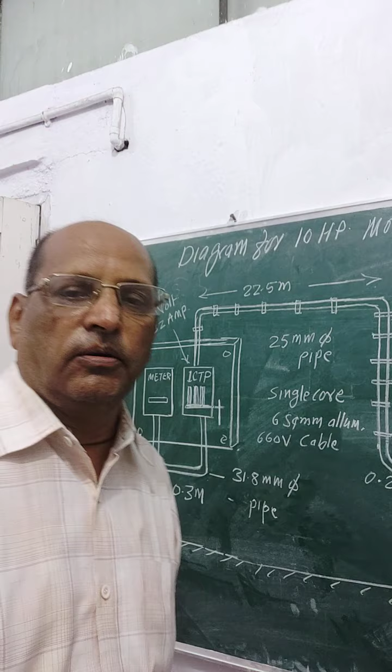Yesterday I have taken the 10 HP problem of induction motor to be installed in a workshop. Diagram I have shown on the drawing sheet, but that was not so clear. So today I have drawn this diagram completely on the board, in which all the dimensions are very clear, so your calculation will be easy to understand.

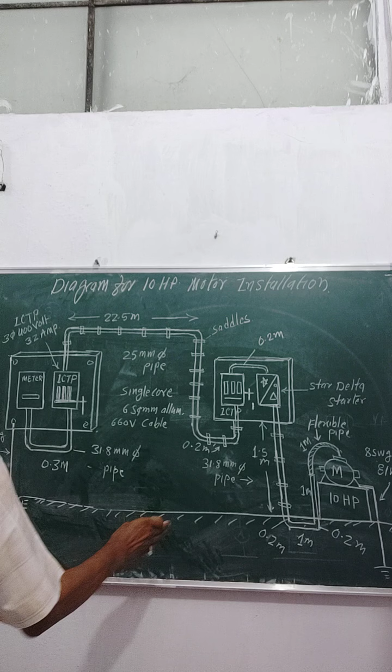See, this is the complete diagram in which I have shown. This is the ground level, all the dimensions are given. This is the main board, meter, ICTP of 32 ampere here.

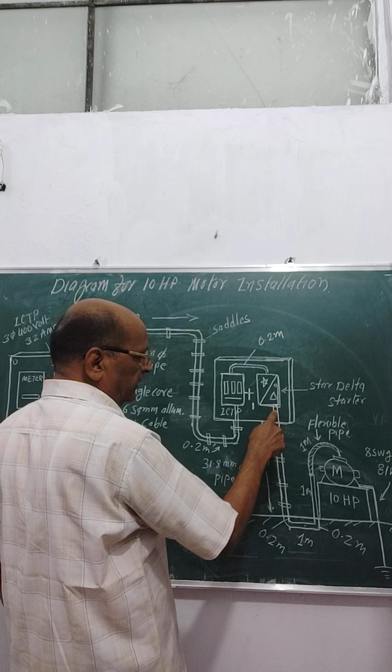Then this is run 25 mm dia pipe from this point to this point. Total length 22.5 meter, then 0.2 meter here. Then here 6 wire will go, so the diameter of pipe will be 31.8 mm.

Because 3 wire will run up to this single core, so up to this total length we do 3 times. Here 6 wire will go up to the motor terminal, so same single core cable of 6 square mm, it becomes 6 times in this. So the calculation or estimate I have already given yesterday, so you just take this drawing seriously. It is given all the detail.

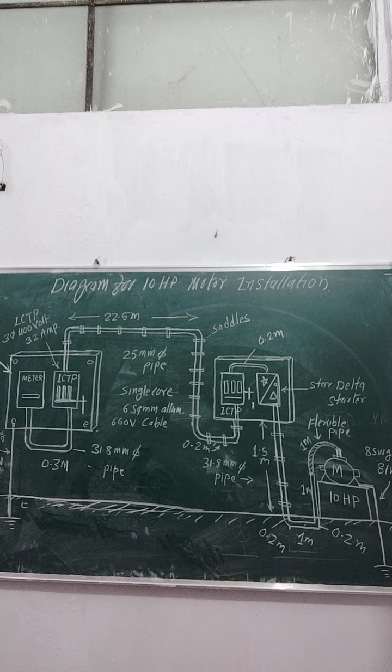This is the meter, supply is coming from the pole or the service pole, and from where this complete diagram is there. So this finishes your total topic number 2, in which there are 2 problems.

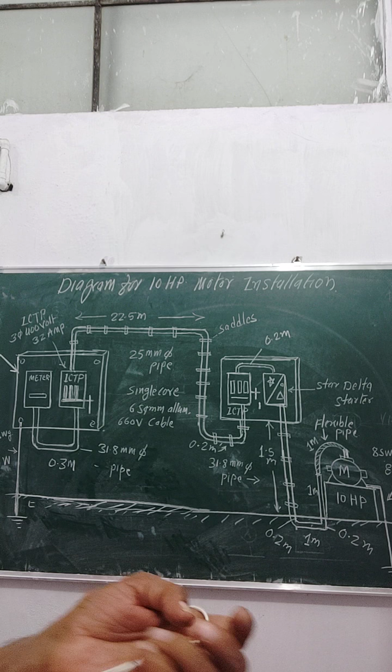So in this diagram there are two problems, one of 10 HP, one of 15 HP. So normally in exam one motor problem will be asked. So this is a complete diagram for one motor, of 10 HP. So total wiring diagram I have shown, and estimate is also prepared according to this particular diagram.

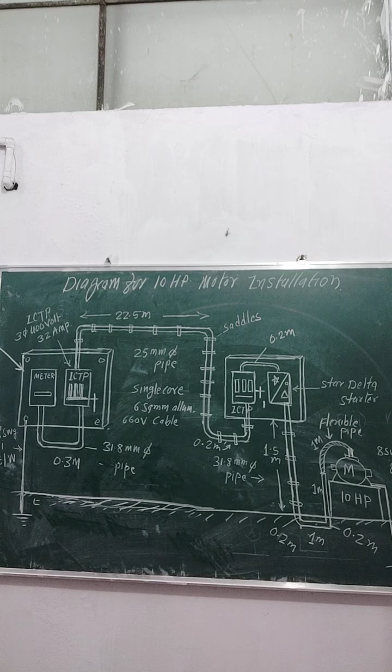So you can take this particular diagram in your notebook, draw it properly with all the dimensions and specification of all the materials given on the board. So this particular diagram will help you in preparing the notes. Once I show it again from near place, so you just see that this diagram is like this.

From main board, pipe is running up to control board and then up to motor. So this is the complete diagram of the 10 HP motor connections. Now from today I am starting topic number 3.

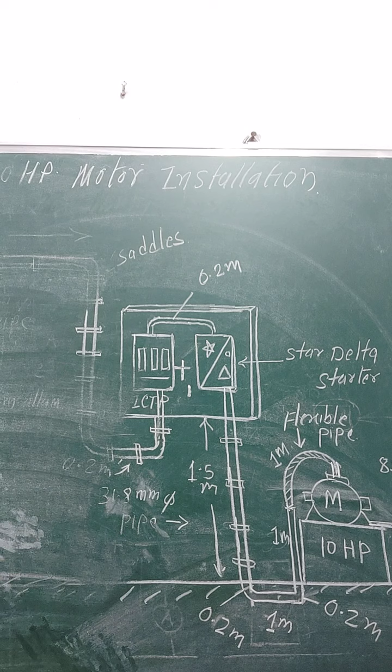Topic number 3 is service line connection. So first we have the definition part of service line connection. Topic 3, service line connection.

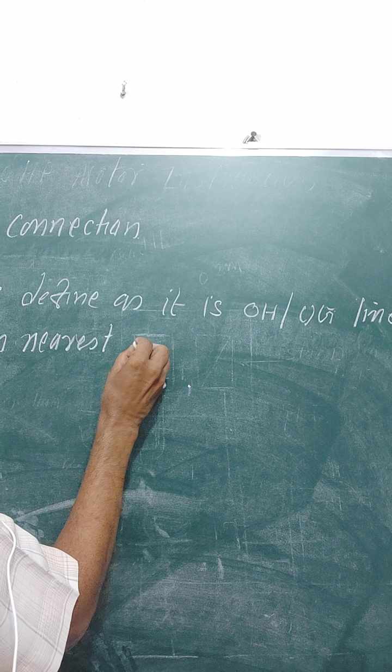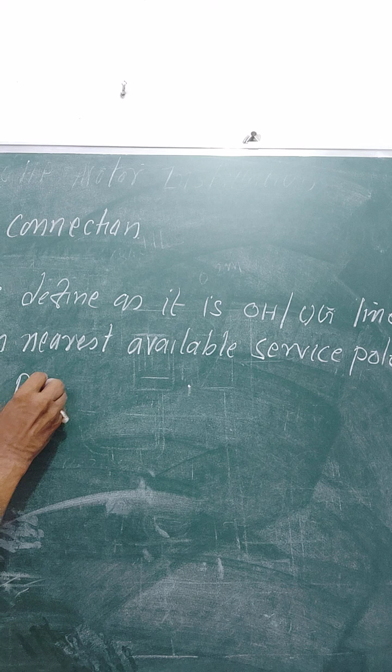So first, service line connection definition. Service line connection is defined as it is overhead or underground line laid between nearest available service pole to consumer premises for feeding electrical supply.

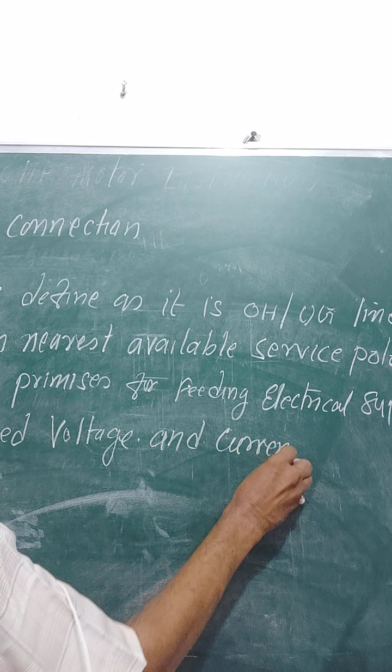Between nearest available service pole to consumer premises for feeding electrical supply at their rated voltage and current, whether single phase or three phase. So this is the definition of service line connection.

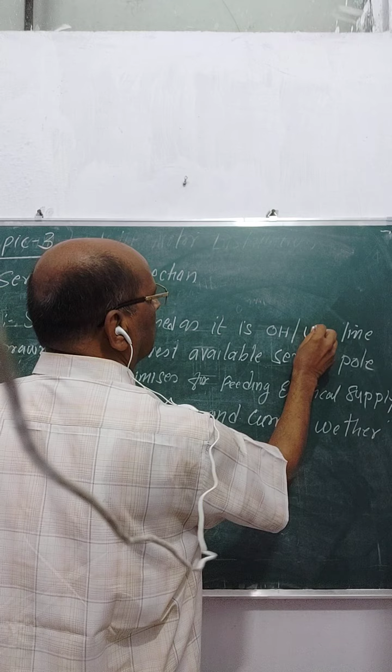Service line connection, service line, here you can put line is, service line is defined as it is overhead or underground line drawn between nearest available service pole to consumer premises for feeding electrical supply at their rated voltage and current.

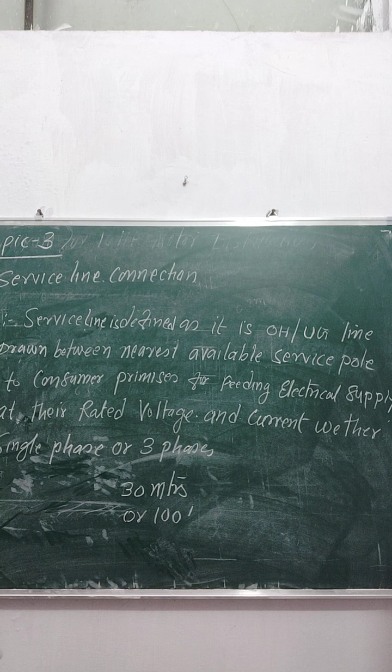Whether on single phase or three phase as required. So this is the basic definition of service line. Now, maximum distance permissible between service line is 30 meter or 100 feet between consumer premises and nearest available pole. If distance is more than 30 meter, then you have to put an additional pole in between. But as per standard, maximum distance is 100 feet between service pole and consumer premises.

Now there are three types of mode in which we can provide the service line. There are three types of mode by which we can provide service line. So it is called modes of providing service line.

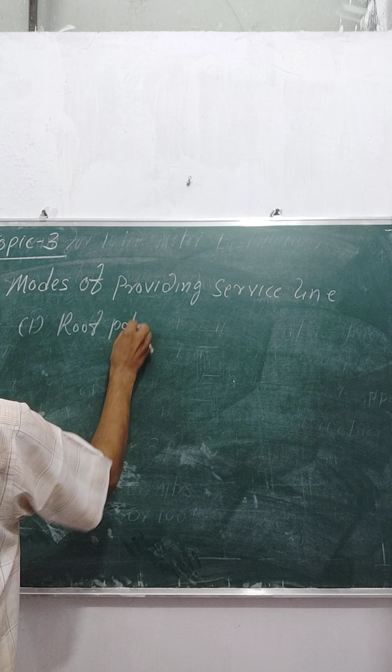First is roof pole arrangement. Second is bracket pipe arrangement. And third is galvanized iron pipe arrangement.

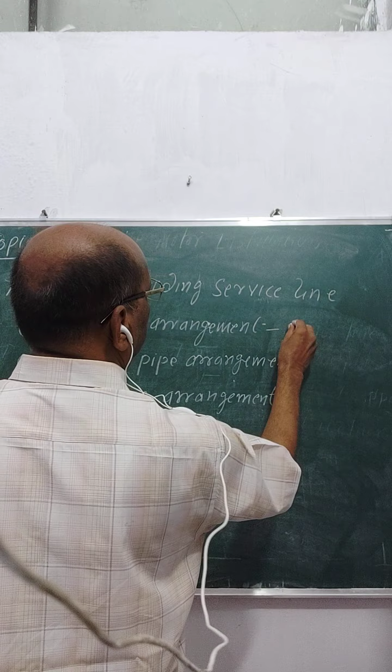So service can be provided on single phase and three phase by these three methods. The first method is only suitable for single phase. Second method, it will be for one phase as well as three phase. This method is also suitable for one phase or three phase. So I will make the diagram of all the three arrangements for different types. So first we will take connection diagram for roof pole arrangement. In roof pole arrangement, this is roof pole arrangement.

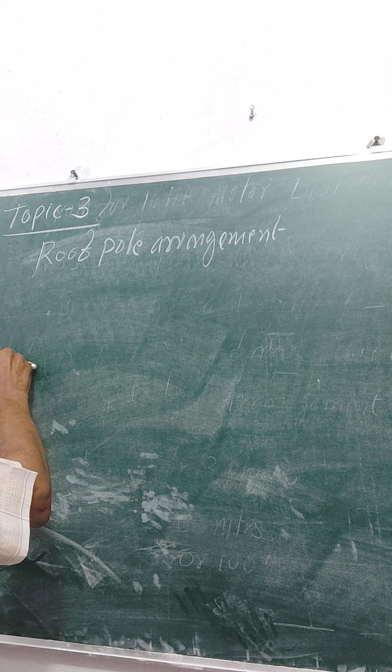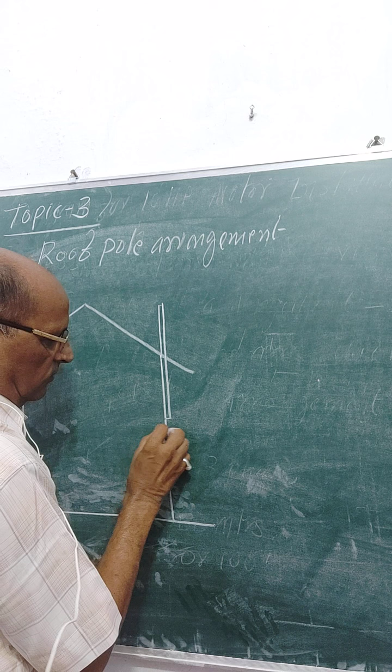In this we run a service angle, and there is a main distribution board at a particular height according to our assumption of internal wiring, that is 11 feet up, 10 feet up from the ground. And here this runs an earth wire.

And if you use bare conductor, so we have to take this shackle insulator with clamps. So this is phase wire, this is neutral wire. And there are spacers to avoid the bouncing effect of wire due to wind pressure.

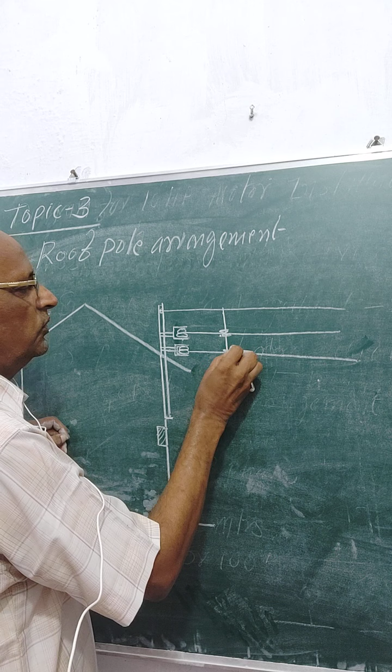So this is the consumer premises. Now supply is to be taken up to the meter board with the help of a pipe of 25 mm dia, service pipe, and it is going to the...

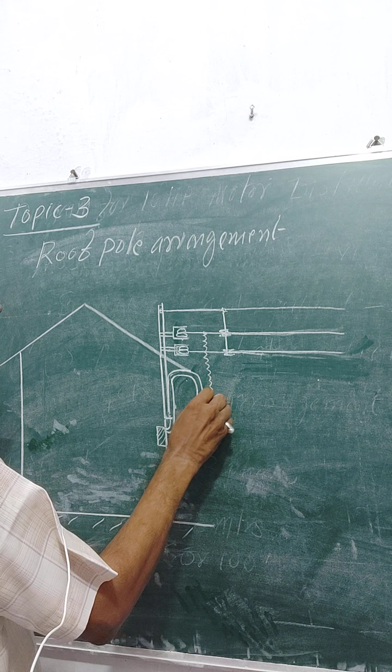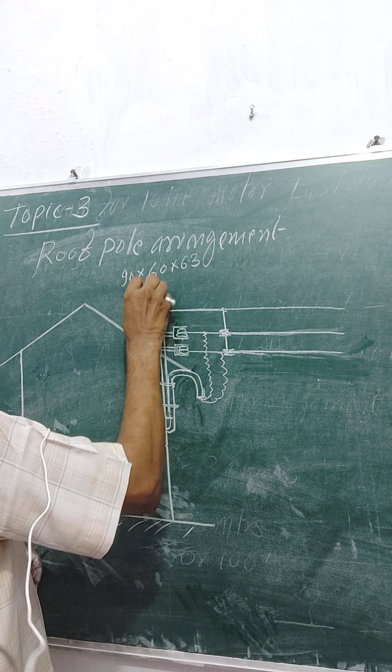This is the connections. This is the roof pole arrangement. So here for fixing the pipe, GI thimbles are required. This is 90 by 60 by 6.3 mm angle iron.

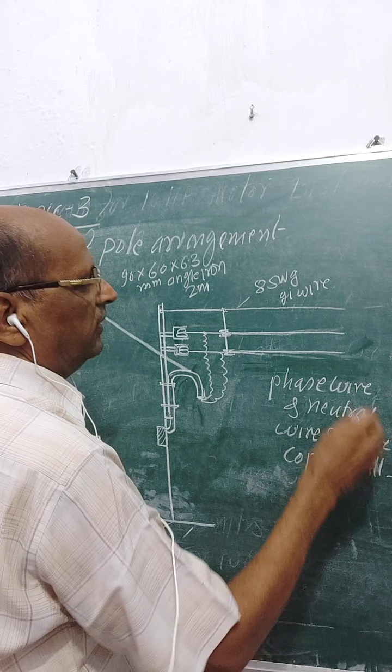Normal length is 2 meter. This is 8 SWG GI wire, and this is phase wire and neutral wire of bare copper or aluminium as required. So this is the phase, this is the neutral, and this is the earth.

So service line is supported like this. There is an aerial fuse. It is mounted here, this is the aerial fuse. This is GI thimble.

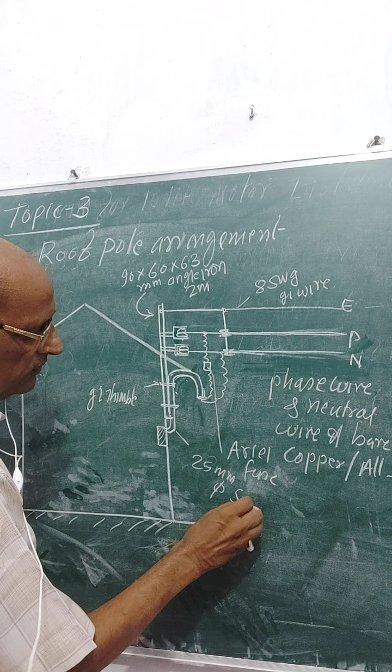This is the angle and this is the pipe of 25 mm dia, service pipe, and this is MDB. So this total arrangement is there for the roof pole arrangement.

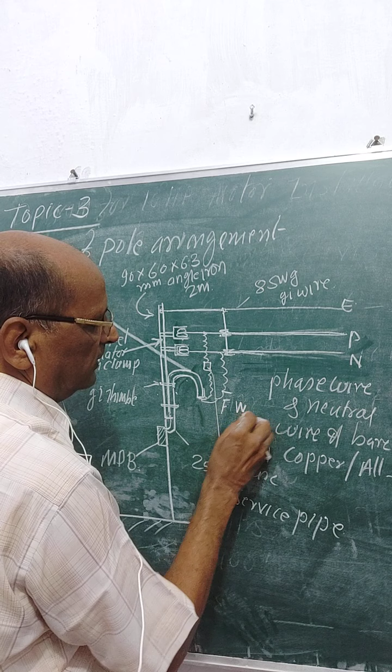This is Shackle insulator with clamp. So these are the Shackle insulators with clamps, and this is the flexible wire, FW. This is for connection, that is FW. So this is the total arrangement at the consumer premises.

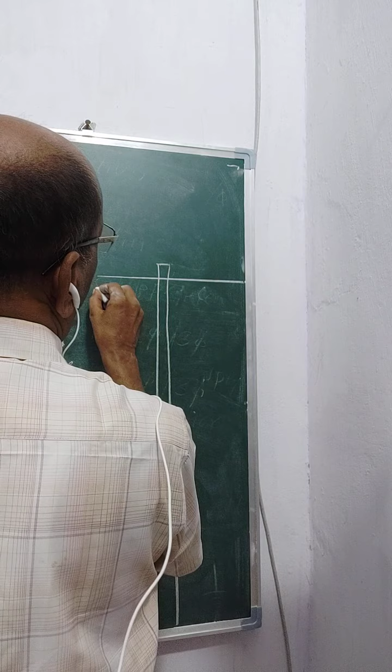Now supply is to be taken from a pole, called the service pole, the nearest available one. Nearest available means we are having distance according to standard, that is 30 meters. So this is R phase, Y phase, B phase, neutral, earth wire and street light. So these are the insulators on which this wire is supported on the pole. This is a service pole.

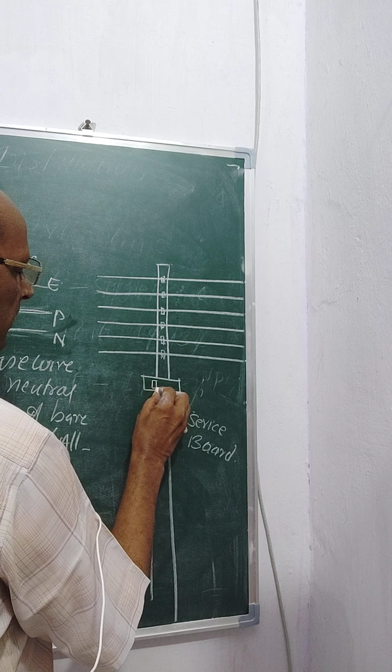Now here this is the service board. Service board from where? From where we can take supply to neutral and phase. So this is R phase, Y phase, B phase, this is neutral, this is earth wire and this is street light phase. So normally an LT line pole has 6 wires.

So we can take any one phase and neutral from this board, and then it is supplied as neutral and phase to the consumers. So this is the service board, which also has an aerial fuse. So if there is any fault in between the pole and the service of the consumer, then this fuse will blow and your line meter is protected.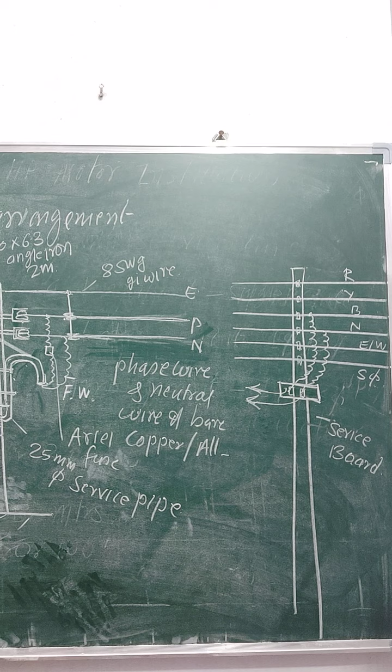So this is the first arrangement, that is called roof pole arrangement. This type of arrangement is nowadays not in use. This is only meant for the old type of houses which are not there anymore.

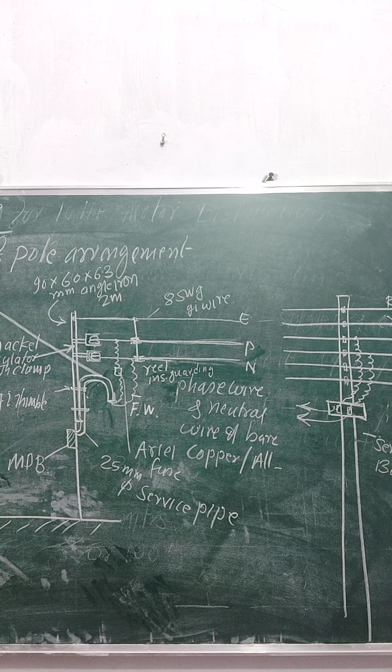This is reel insulator guarding, also called wheel insulator guarding. So due to wind pressure, when this wire will bounce, this will act as a spacer, so it can avoid short circuit in bare conductor.

Nowadays people are not using this type of arrangement, they are doing it by cable. They use a 2-core cable and one shackle insulator here, then draw the line. So this is the old type of system which is not in use nowadays. This pole will be common for all connections, 3-phase and single phase. So pole as it is will be there, and I will change only the consumer premises.

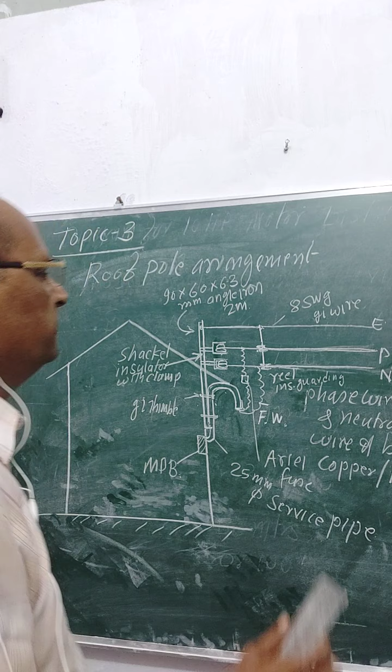Now second one, after taking this diagram, second one is that is bracket pole system, bracket pipe system. Second is bracket pipe system or arrangement. We can say arrangement or system arrangement.

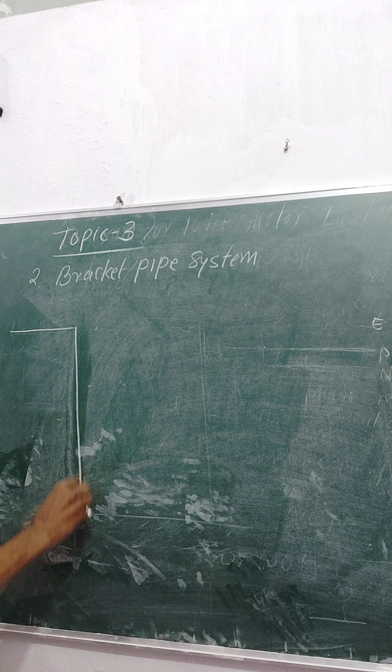Now multi-storied building, whether it is a 2-storied or 3-storied or multi-storied, we can take this type of connection for normal house, row type of houses, in which this is an angle iron supported on the wall. This is angle iron 90 by 60 into 6.3 mm, and this is a cross bracing support, and here we use shackle insulator again.

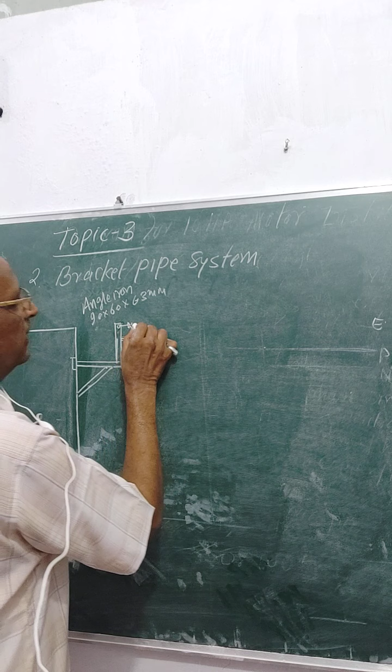Now whether you can take a wire of cable form or bare conductor. So these insulators are provided, and here with the help of earth wire clips or clamp, we run the earth wire, and this is the phase wire, neutral wire and earth wire.

MDB again at the stipulated height as I have given in the internal wiring, and this will be the pipe of service. This is service pipe. This is the service pipe supported by GI thimble or pipe clamps. This is bracing.

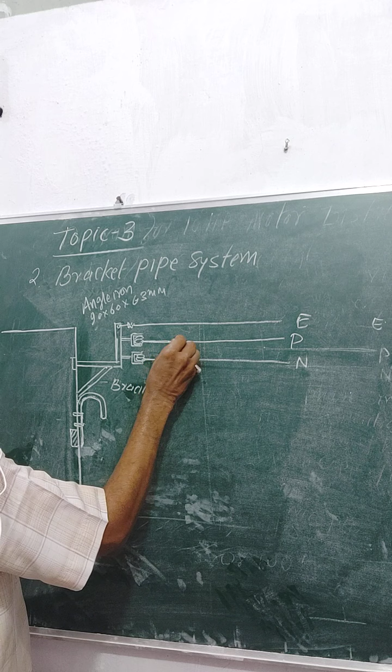This is 4 or 6 square mm copper/aluminum cable or bare conductor for phase and neutral, and there is again we put here spacers of porcelain insulators supported with GI wire. So this will be the bracket pipe arrangement for single phase.

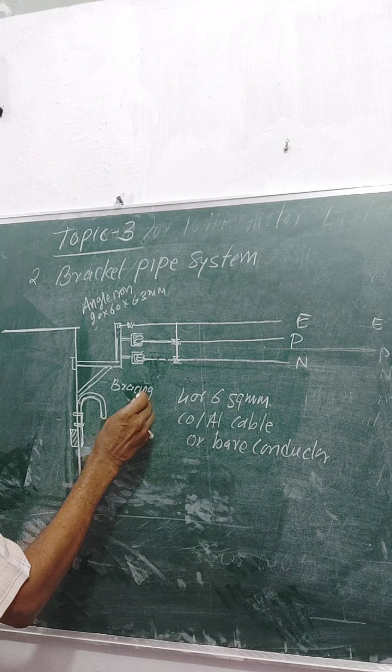Okay, supply is taken, bracing, here I will write bracing, and this is bracket clamp. So bracket can be supported on wall. Bracket clamp, this one. And from phase and neutral, I will tap. In phase we put here an aerial fuse. This is aerial fuse. And these are the flexible wire.

Normally use 40/76 gauge wire for this. This is the gauge of the wire for the flexible wire for connection from this place to MDB. And this is pipe of

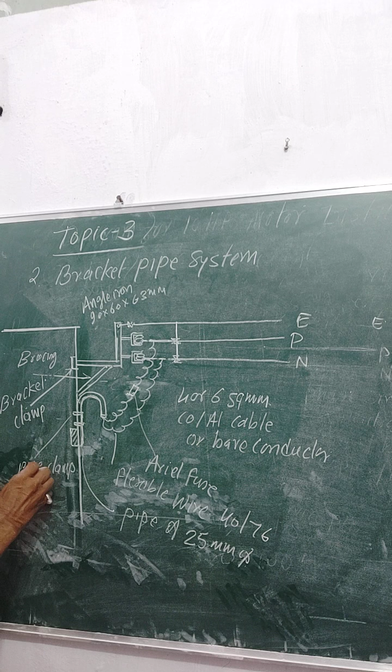25 mm dia, GI pipe, is supported by pipe clamps. So this is the bracket of angle iron on which shackle insulator

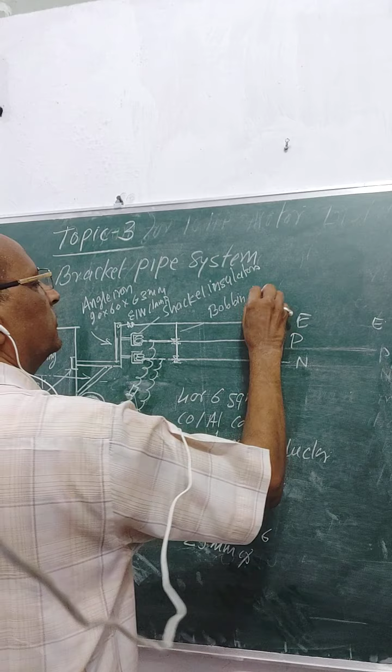with clamps are there, and this is earth wire clamp. This is earth wire clamp, and this is bobbin insulator spacer. These are the bobbin insulator spacer.

The earth wire is of 8 SWG, which is binded on this, and neutral and phase are taken from the service board. So this is phase is coming and neutral is coming. So this is the complete arrangement for consumer side in bracket pole system or bracket pipe system.

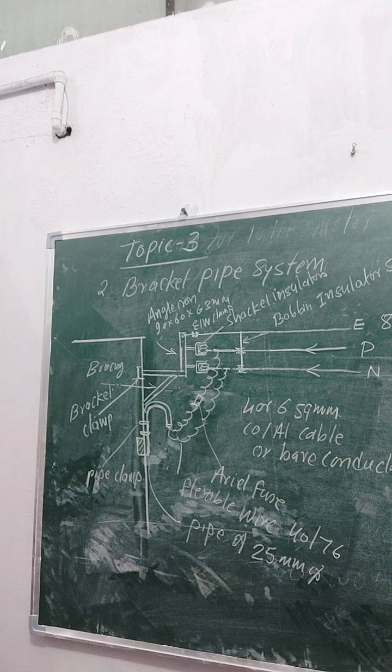Okay. Sometimes this bracing they may use here also, depending upon the length of the angle. So bracing can be taken on this side also, like this. So both arrangements are possible depending upon length of this bracket. Okay.

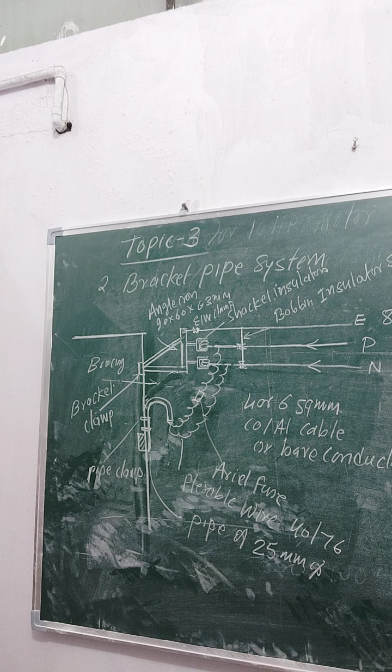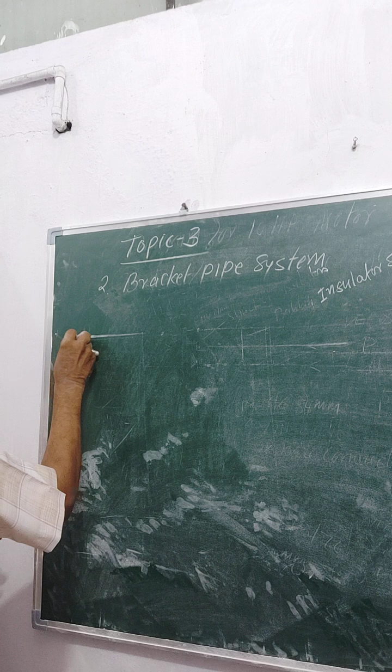Similarly, same diagram can be converted for 3-phase, in which the bracket will be changed and other arrangement will be same. So I just, on the same diagram, I will just convert it into 3-phase. For 3-phase, when we want to give 3-phase supply, then bracket will be slightly changed in this manner.

And a cross bracing is again put for mechanical strength. And service pipe, it is given here like this. This is now in 3-phase, its diameter is up to 50 mm. We can take diameter up to 50 mm size. So this is the pipe clamps or saddles for 50 mm pipe, this is 50 mm pipe,

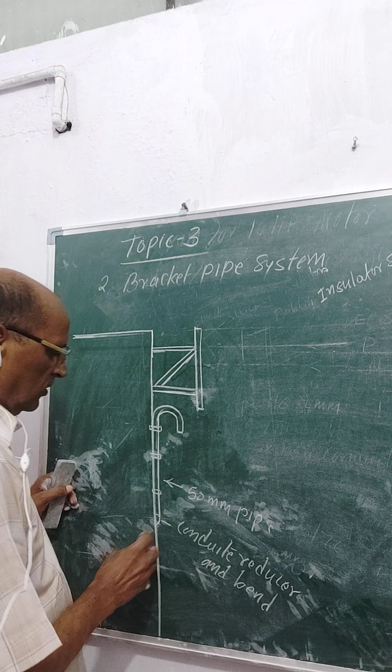and for inside we are having a conduit reducer. And bend. So normally what happens, up to this we take 50 mm, and then turn it into inside the wall, and from here this is taken up to main board. This is a double storey building, okay. So this is the main distribution board here, and this pipe may be of 30 mm dia. So we use a conduit reducer, okay, because this will carry the flexible wire.

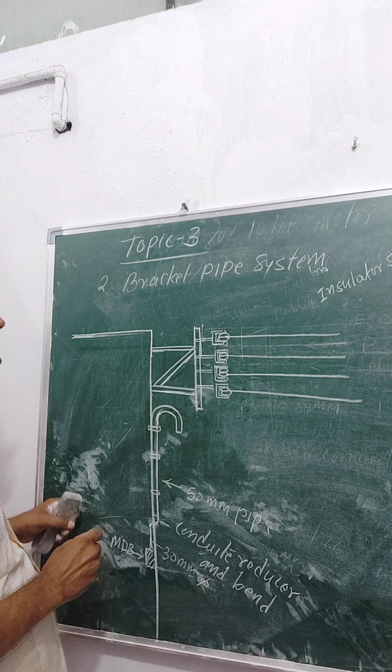Now here for 3-phase, the clamps are provided for neutral, phase, and this is the first one, this is second one, this is third one, and this is fourth one. So these are the shackle insulator with clamps. So this one R phase, Y phase, B phase, and neutral. Okay. So this is the bracket.

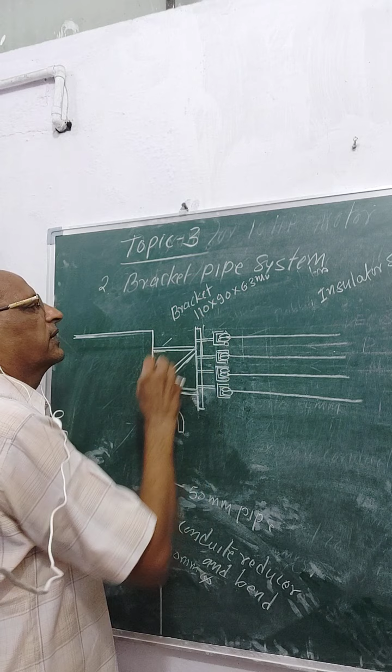Now in 3-phase bracket, the specification will change. This is 110 by 90 mm angle with 6.3 thickness. So bracket of this size, and these are the shackle insulator with clamp. This is R, Y, B, and neutral. So this will maybe a 10 square mm

cable or bare conductor of aluminum or copper. Either aluminum or copper, depending upon the budget. Okay. For bracket to support on the wall, these are the bracket clamp.

These are the bracket clamp, and these are the pipe clamps.

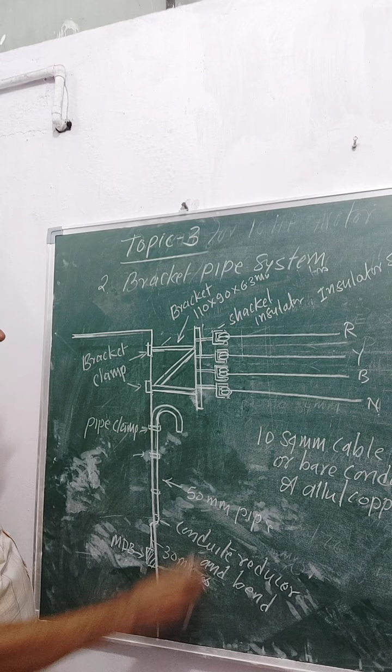Now line is taken again with the help of flexible wire, and then neutral. This wire will go inside up to the main distribution board, and this will be a 3-phase connection for a consumer of that nature.

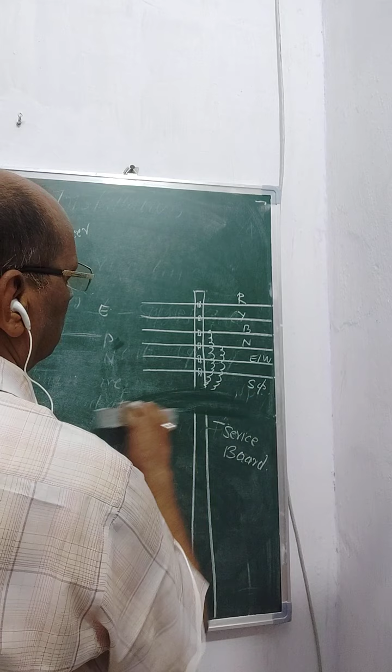Supply is again to be taken from this pole, all the 3-phase. So here the board will change. This service board is for 3-phase now. It is slightly bigger in size, so there are 3 cutouts and 1 neutral link, so you can have supply to this single phase.

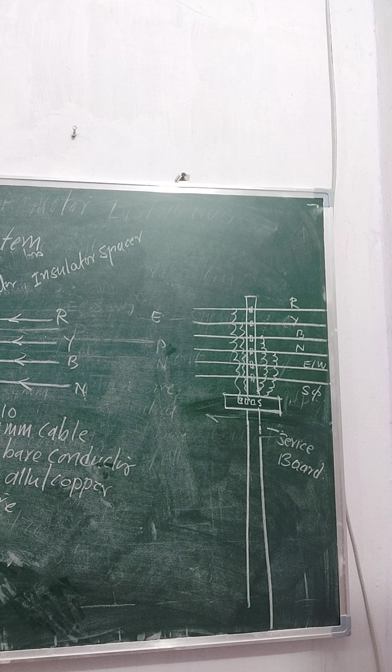Aerial fuses are not provided here in three phase. It is only provided on the pole. So this line is connected there with the help of earth wire, and then it will come. So all the three phase aerial fuses are mounted on the board at the pole.

Diameter of this pipe is 50 mm maximum, because thick wire will have to run of 4 numbers - RYB and neutral - so the pipe is taken slightly more in diameter.

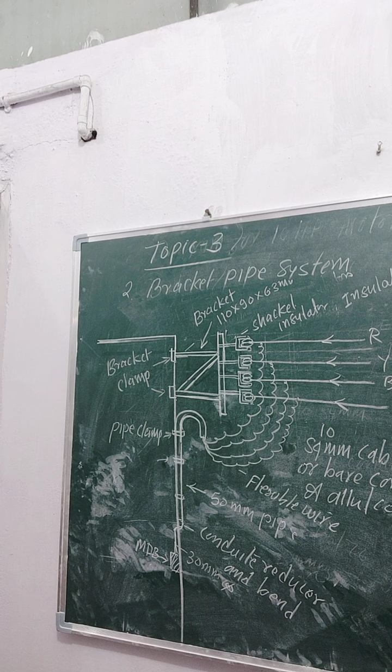Then here it is directly terminated into the main distribution board with just an elbow turning. So one bend we use here, one bend is used, and from the bend the supply is brought up to the meter board. So this is the bracket system for three phase.

Now the third arrangement, that is the GI pipe system.

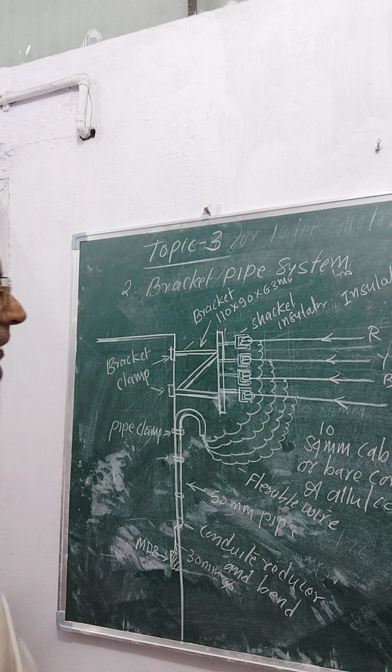Now we come to the third mode, that is called GI pipe system.

GI pipe system is also suitable for both single phase and three phase. So GI pipe system...

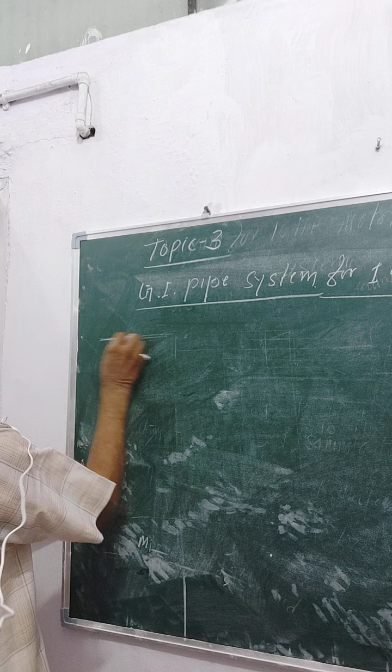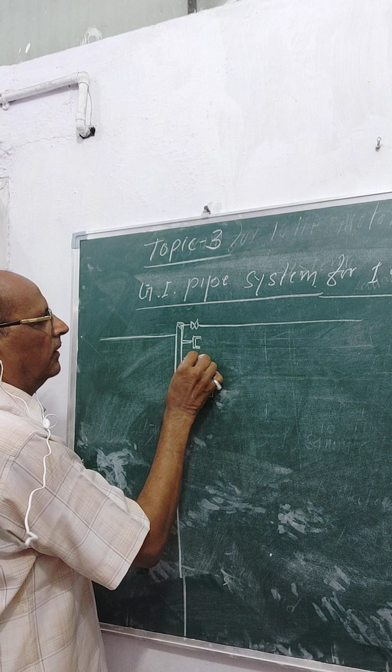And here we are having this earth wire clamp to run the earth wire, and here we take two shackle insulators again, so here one thing is there, that this pipe is taken from the upper side.

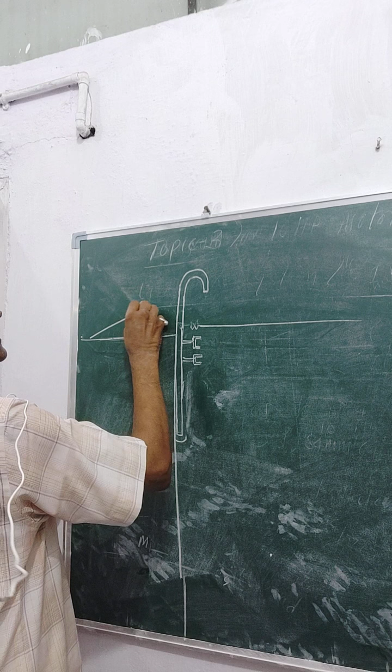And there is a stay arrangement taken on this pipe.

Here we use these spacers.

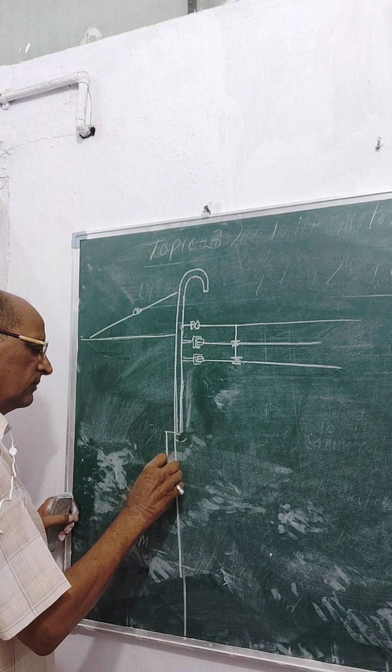This is MDB. So naturally supply is going like this, not from earth wire but from neutral and phase. So this is earth wire, this is phase and this is neutral.

Rating is again similar to that of the first one. So this is the clamp for the shackle insulator. The things are with the same dimensions.

Things are of same dimensions. These are the pipe clamps.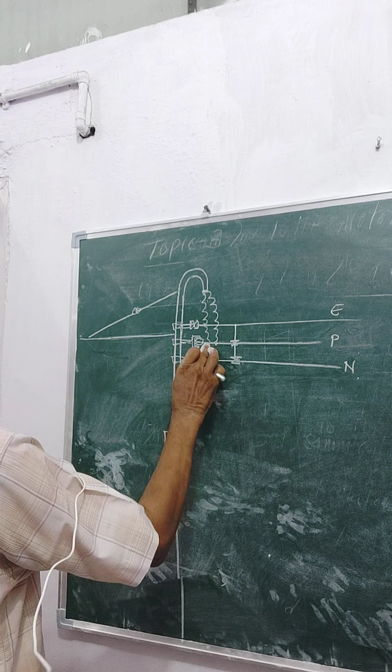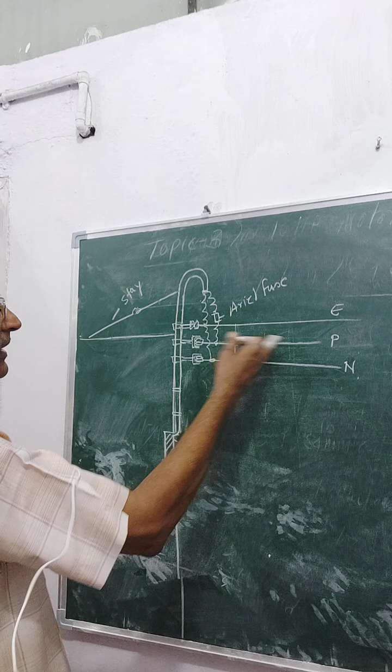There will be an aerial fuse from the phase. So this is the phase wire, and here you can have the aerial fuse. This is the aerial fuse, and this is stay to support the wire, so it is a wire stay. All other dimensions are same, so I will not write again: phase wire area of 10 square mm aluminum copper. This is shackle insulator.

This is spacers for avoiding bouncing effect due to wind pressure. So this is the arrangement for GI pipe system for single phase.

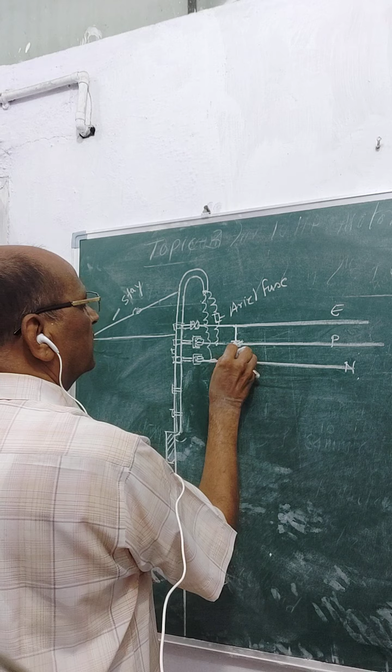Taken again from that place, and this is tied on the wall, this pipe on 3 places, and then brackets are attached here for earth wire, and these shackle insulators. From there the line is tapped from the pole with the help of this wire. So this wire, as I have told you, it may be bare conductor or cable. Both can be taken as per the choice.

Now similar diagram can be made for 3 phase. In 3 phase GI pipe system, slightly thick pipe is taken, that is of 50 mm dia, and then this conduit bend is there, and this is main distribution board, MDB. So this is like this.

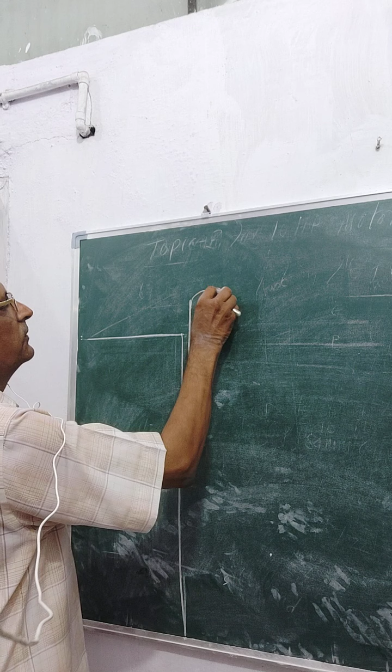Now here this pipe is grouted with the help of pipe clamps, and there will be again 4 shackle insulators used. This is for R, Y and B, and this is neutral.

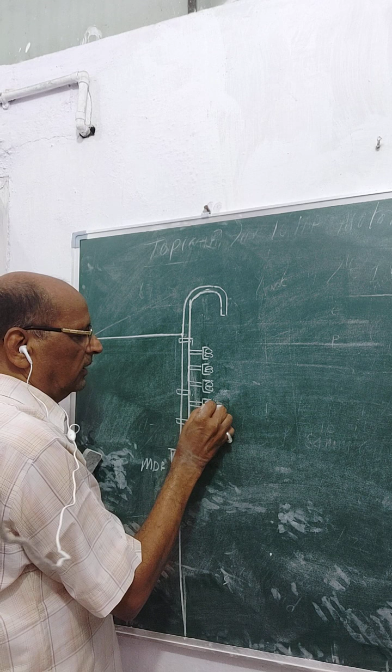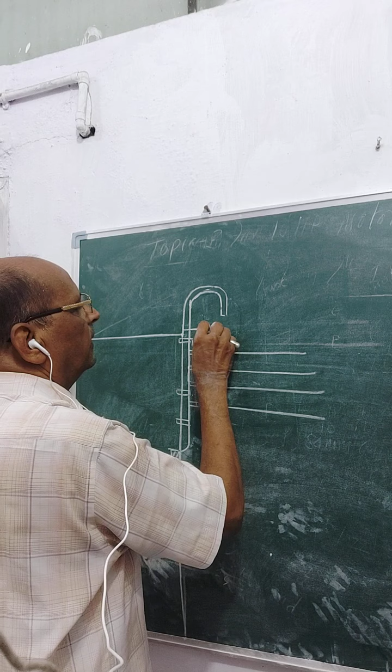Earth wire can be taken from this by providing here an earth wire clip or earth wire clamp. This is earth wire clamp. And here there is a catenary guarding.

It is to be provided in both the case of three-phase bracket system and three-phase pipe system. This is the catenary guarding. This is called catenary guarding.

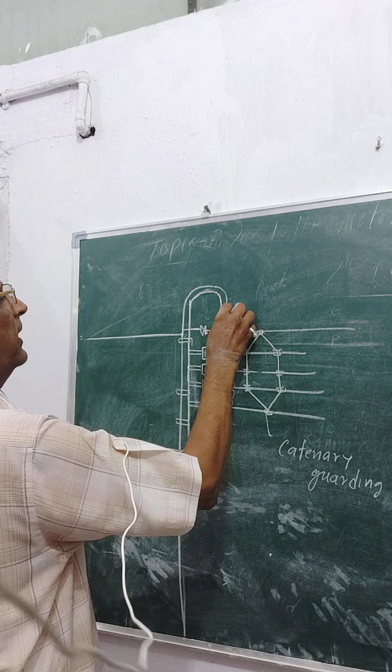These are the shackle insulators. Now supply is taken from R, Y, B phase and neutral. So the supply is available from this pipe, inside this, come up to the main distribution board. This is the three-phase system for GI pipe system.

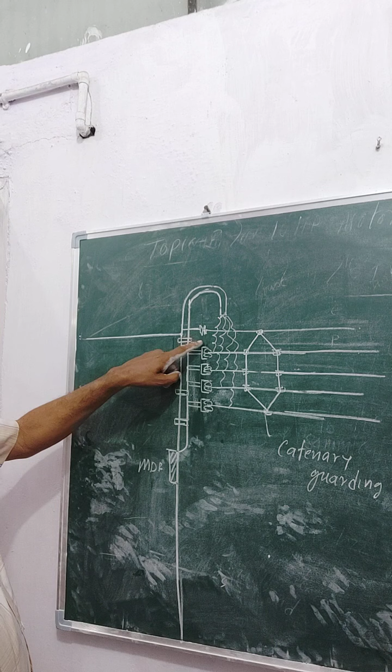So again, it is not necessary to write so many things here. I just explain: these are the pipe clamps, these are the shackle insulator with clamps, this is the earth wire clamps.

This is the flexible wire from which supply is taken. This is R phase, Y phase, B phase and neutral. This is again copper conductor or aluminum conductor, depends on the budget of the consumer, whether he is taking aluminum conductor or copper conductor.

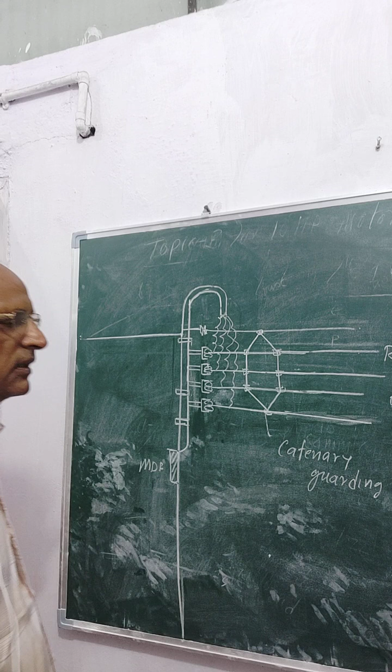Normally aluminum conductor is preferred because these wires of LT line are of aluminum. So aluminum to aluminum connection is there, which can be easily made, and there is no problem of carbonization.

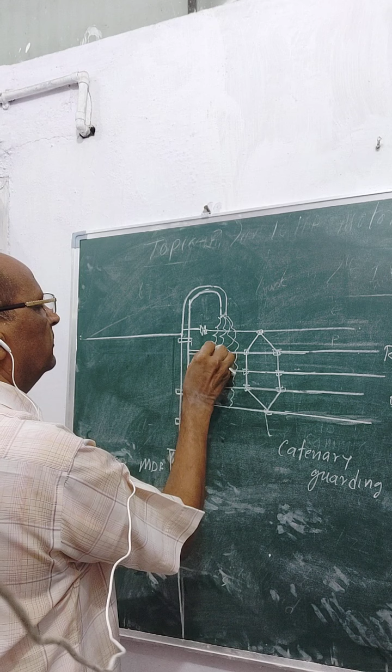So this is the shackle insulator supported on the pipe directly, and pipe is directly supported on the wall. So this is a three-phase system used for GI pipe system, and before that I have taken bracket, single pole, single phase and three phase.

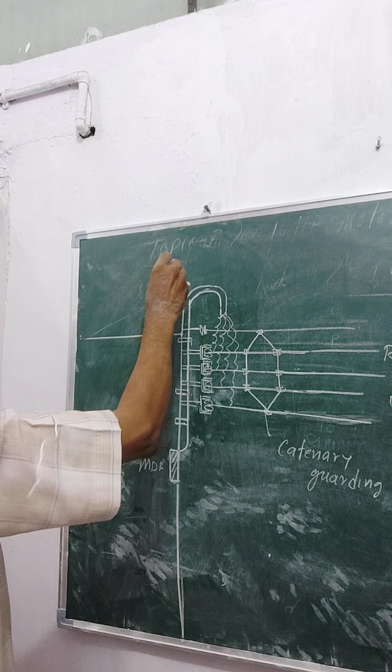So this is a three-phase GI pipe system arrangement or system, whatever you can take.

Okay, so this is all about the theory of service line connection. Maximum distance between this pole and premises is taken as 100 feet, that is about 30 meter.

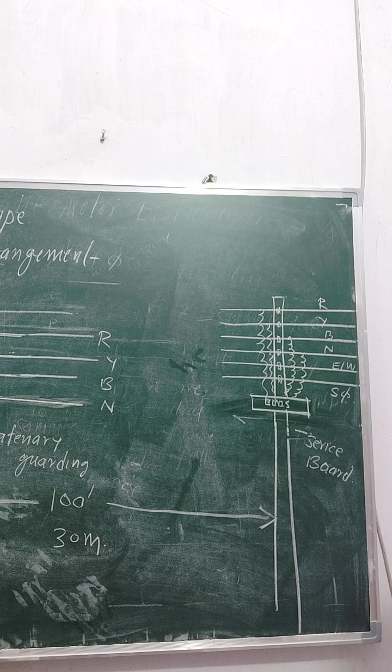Up to 100 feet you can take direct. So this is the arrangement for three-phase GI pipe arrangement for service pole. So this is all for today, that is the theory portion of this particular topic. Number 3, service line connection.

Maximum load for single phase is 2 kilowatt, and if load is more than 2 kilowatt, then you go for three-phase system for 5 kilowatt, 10 kilowatt or other load. So in that case you will go for 3 phase. So rating of the wire is again decided by the same formula: kilowatt power divided by V cos phi in single phase, and in 3 phase kilowatt power divided by root 3 V cos phi. So that will give the current rating of the cable, and according to that current rating you can find out.